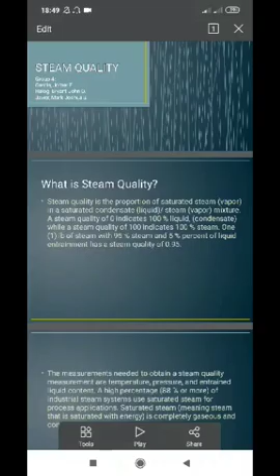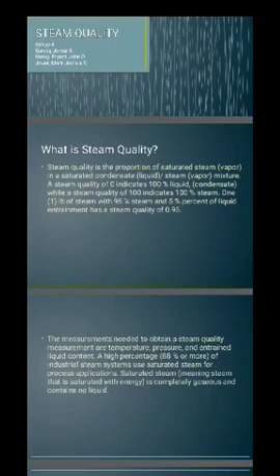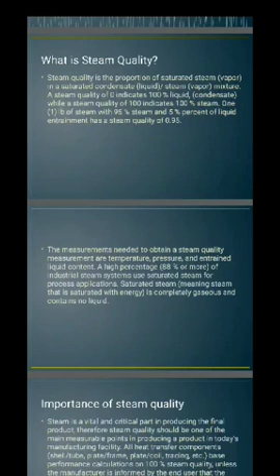So, what is steam quality? Steam quality is the proportion of saturated steam vapor in saturated condensate liquid, or steam vapor mixture. A steam quality of 0 indicates 100% liquid condensate, while a steam quality of 100 indicates 100% steam. The measurements needed to obtain a steam quality measurement are temperature, pressure, and entrained liquid content.

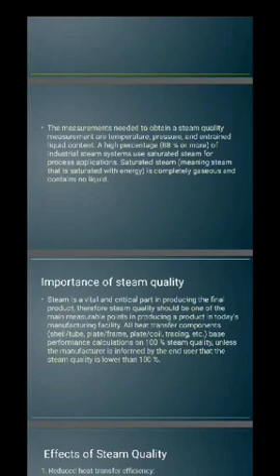So, what is the importance of steam quality? Steam is a vital and critical part in producing the final product. Therefore, steam quality should be one of the main measurable points in producing a product in today's manufacturing facility.

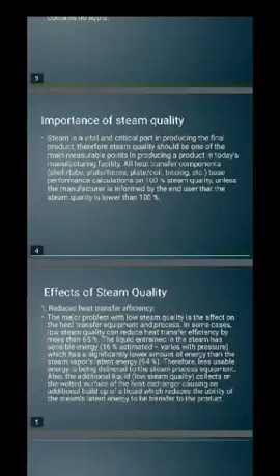So, these are the effects of steam quality. Number 1, reduced heat transfer efficiency. The major problem with low steam quality is the effect on the heat transfer equipment and process.

Number 2, premature valve failure. Liquid passing through a steam control valve will erode the internals of the valve, causing premature failure.

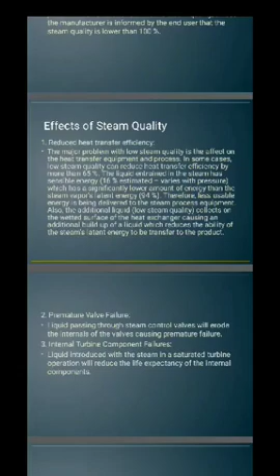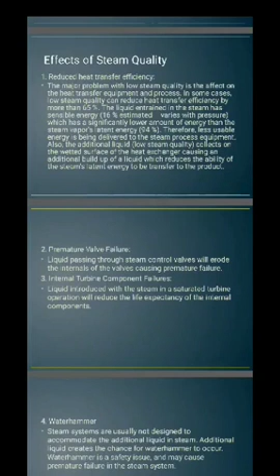Number 3, internal turbine component failures. Liquid introduced with the steam in saturated turbine operation will reduce the life expectancy of the internal components.

Number 4, water hammer. Steam systems are usually not designed to accommodate the additional liquid in steam.

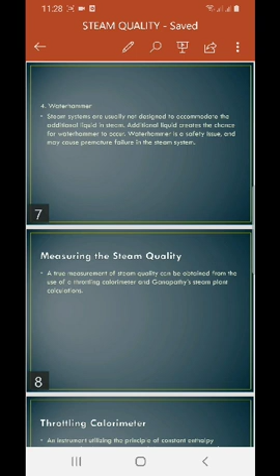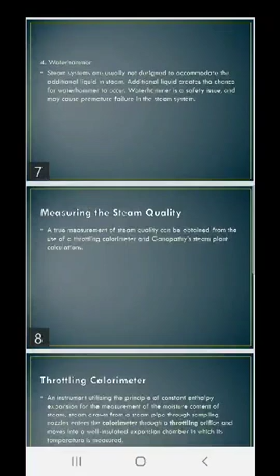So, measuring the steam quality, a true measurement of steam quality can be obtained from the use of a throttling calorimeter and Ganapathy's Steam Plant Calculations. This Steam Plant Calculations is a book containing steam plant calculations.

So, in this way of getting the steam quality, you just have to calculate or get the steam quality by getting the value from this book, the value at a certain pressure, enthalpy, temperature, and so on, and then substitute it in the formula.

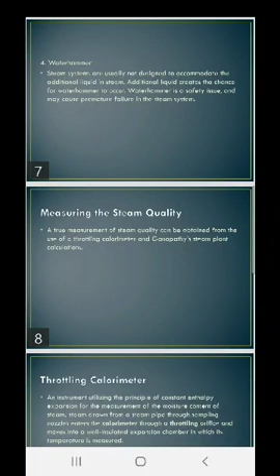Let us focus on this throttling calorimeter. The throttling calorimeter is an instrument utilizing the principle of constant enthalpy expansion for the measurement of the moisture content of steam.

Steam drawn from a steam pipe through sampling nozzles enters the calorimeter through a throttling orifice and moves into a well-insulated expansion chamber in which its temperature is measured.

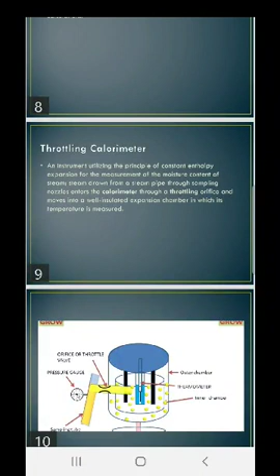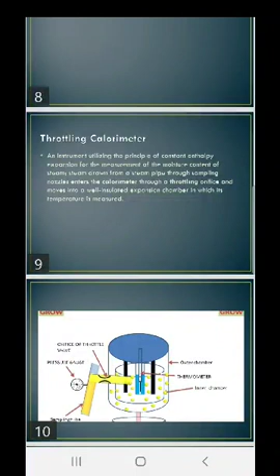So what do you mean by this constant enthalpy expansion? Constant enthalpy expansion means there is no change in enthalpy. This process used by the throttling calorimeter is called the throttling process, in which there is no change in enthalpy from state 1 to state 2, no work is done, and the process is adiabatic, meaning no heat is added or rejected.

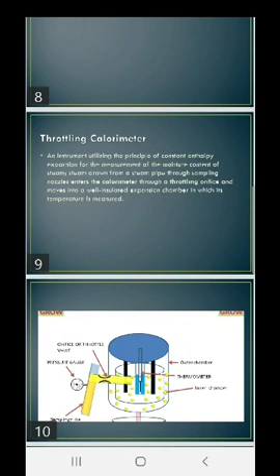So what really is this throttling process? The throttling process is a process in which a high pressure fluid is converted to low pressure by using a throttle valve.

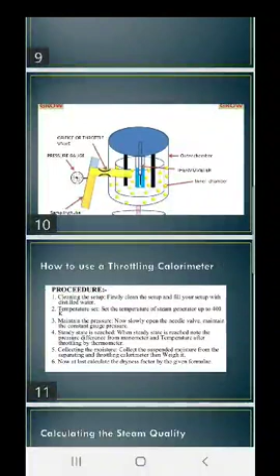So this is the image of a throttling calorimeter. It has the orifice or throttle valve, the pressure gauge, sampling tube, outer chamber, thermometer, and inner chamber. This pressure gauge and thermometer are specifically used to measure the temperature and pressure after the fluid gets inside, after the throttling process.

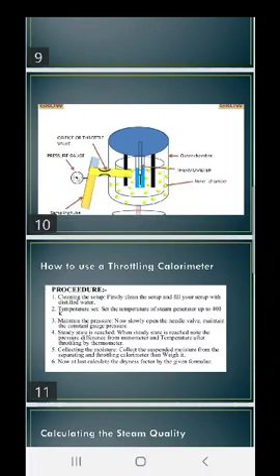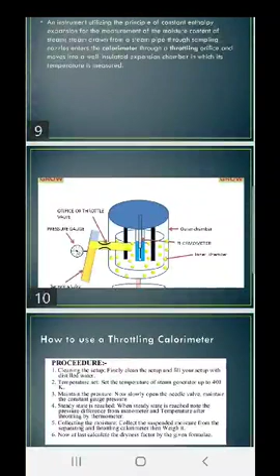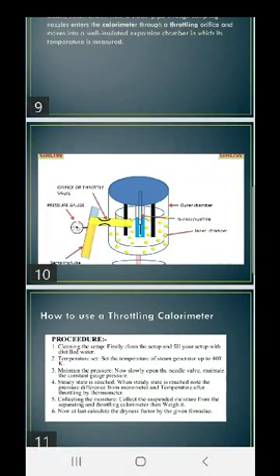Steam drawn from a pipe through sampling nozzles enters the calorimeter through the throttling orifice, which you can see in this image, the throttling orifice or throttle valve, and moves into a well-insulated expansion chamber in which its temperature is measured. There are two chambers, the outer and the inner chamber, and there is the thermometer which measures its temperature. So this is the procedure on how to use this throttling calorimeter.

So first, cleaning the setup. Clean the setup and fill your setup with distilled water. Of course, before using any kind of instrument, you will first clean it so you have an accurate measurement.

So for the second step, temperature set. Set the temperature of the steam generator up to 400 Kelvin.

Next, maintain the pressure. Slowly open the needle valve, maintain the constant gauge pressure. The pressure gauge is now in use, and it will help you maintain and observe the gauge pressure inside the throttling calorimeter.

For the fourth procedure, steady state is reached. When the steady state is reached, note the pressure difference from the manometer and the temperature after throttling by the thermometer.

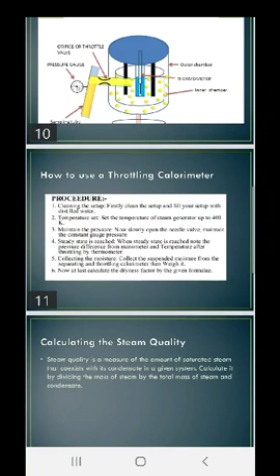For the fifth procedure, collecting the moisture. Collect the suspended moisture from the separating and throttling calorimeter, then weigh it.

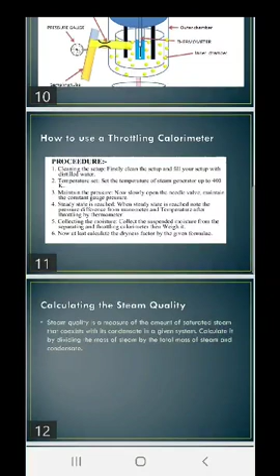So now you have the moisture content of the specific steam with a specific pressure and temperature. Last, you will calculate the dryness factor by the given formula. There is a given formula for calculating the steam quality, but I will no longer explain it because the third reporter will specifically discuss it further. So that's it, thank you.

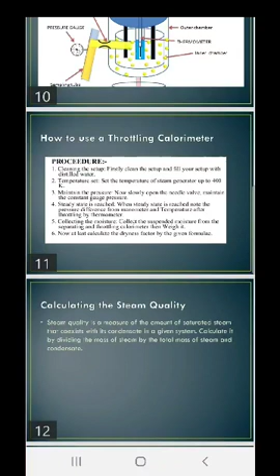My report is all about measuring the steam quality. A true measurement of steam quality can be obtained from the use of a throttling calorimeter. This is the throttling calorimeter.

A throttling calorimeter is an instrument utilizing the principle of constant enthalpy expansion for the measurement of the moisture content of steam. Its working principle is that steam drawn from a steam pipe through sampling nozzles enters the calorimeter through a throttling orifice and moves into a well-insulated expansion chamber in which its temperature is measured.

So the procedure using a throttling calorimeter is: firstly, clean the setup and fill your setup with distilled water. Then set the temperature of the steam generator up to 400 degrees Kelvin. Then slowly open the needle valve and maintain the constant gauge pressure.

When steady state is reached, note the pressure difference from the manometer and the temperature after throttling by the thermometer. Then collect the suspended moisture from the separating and throttling calorimeter, then weigh it. So lastly, calculate the dryness factor by the given formula.

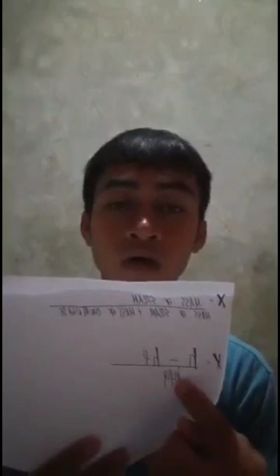So the formula is: mass of steam over mass of steam plus mass of condensate, or X is equal to H of the mixture, minus HF, the enthalpy of saturated liquid, all over HG, the enthalpy of saturated gas, minus the enthalpy of saturated liquid.

So why is measuring the steam quality important? First, you can determine whether it was low quality steam, which is what we want to avoid. In low quality steam, it would contain a high moisture percentage and therefore damage the components more easily. There's more water than steam, which is dangerous because it could cause corrosion to the metal or the pipes and any other parts of the machine, causing chemical reaction and corrosion.

So high quality steam would not corrode the engine. Why is steam quality very useful? It is very useful in determining the enthalpy of saturated water-steam mixtures, since the enthalpy of steam is many orders of magnitude higher than the enthalpy of water.